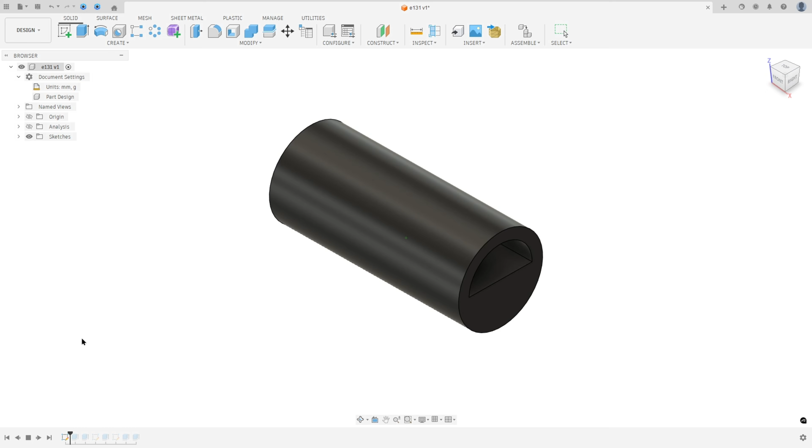Let's make one more tutorial in Autodesk Fusion. In this video, you'll learn to use the extrude and offset extrude. So open Fusion and let's go.

The first step to create this part, we will select the right plane and create this sketch. First we'll create this line here and these two lines. This line has 150 millimeters of length, and these two lines have 10 millimeters of length. The midpoint will be in the center of this line.

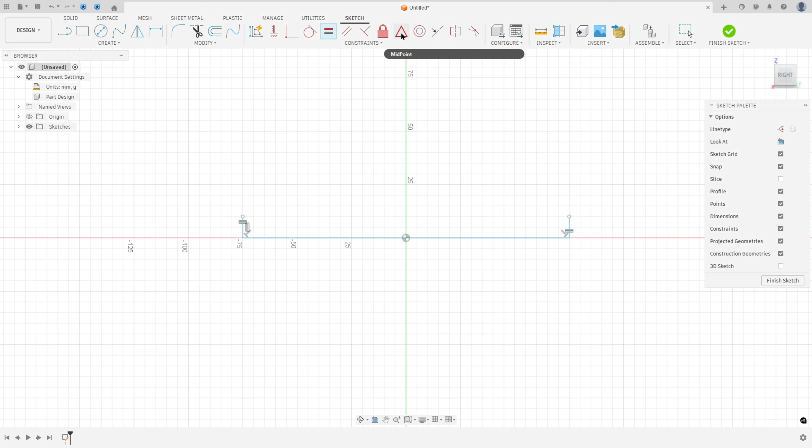Open Fusion, go to create a sketch, and select the right plane. Select line, make this sketch here, and go to constraint, select equal, select this line and this one. Go to constraint again and select midpoint, select this line here and the center point here.

Now go to sketch dimension. The length here is 150 millimeters. This line has 10 millimeters.

Now we will create this circle. This circle has 40 millimeters of radius, and the distance between this edge here and the midpoint is 20 millimeters.

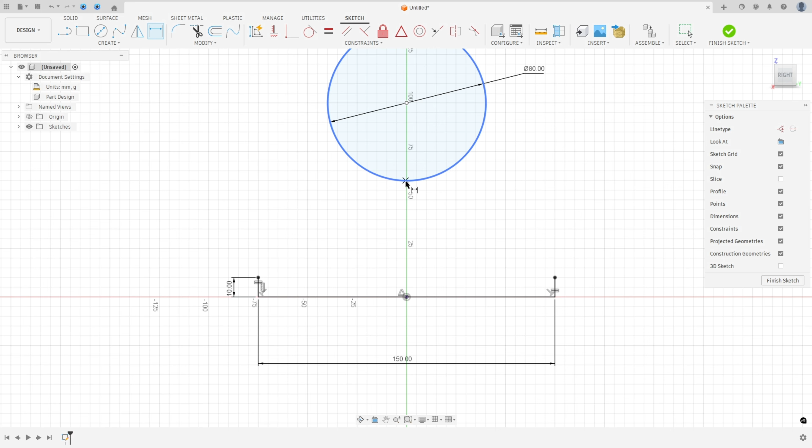Select this circle, make a circle here, 80 millimeters of diameter. Go to sketch dimension, click with the right button and select Pick Circle/Arc Tangent. Select this point here and this point here. The distance here is 20 millimeters. Go to constraint, select horizontal/vertical, select this point and the midpoint.

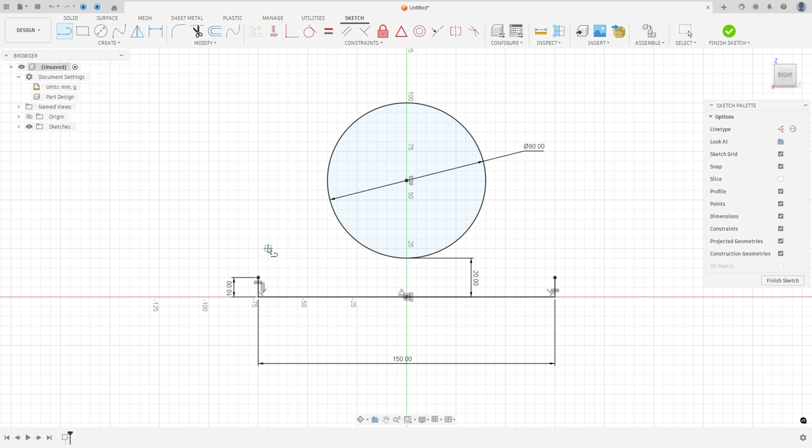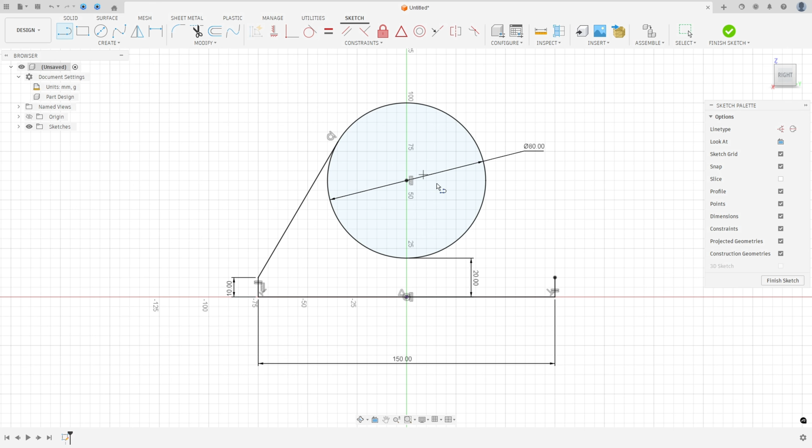Now we will make this line here and this one. This line is coincident with the point here and tangent with the circle. Select line, click on this, and click on the circle. When you see this symbol, it means the line is tangent with the circle. Or if you don't find this, just click in the circle and go to constraint, select tangent, select this line and this. Make the same on the other side. Sorry, I made two lines here.

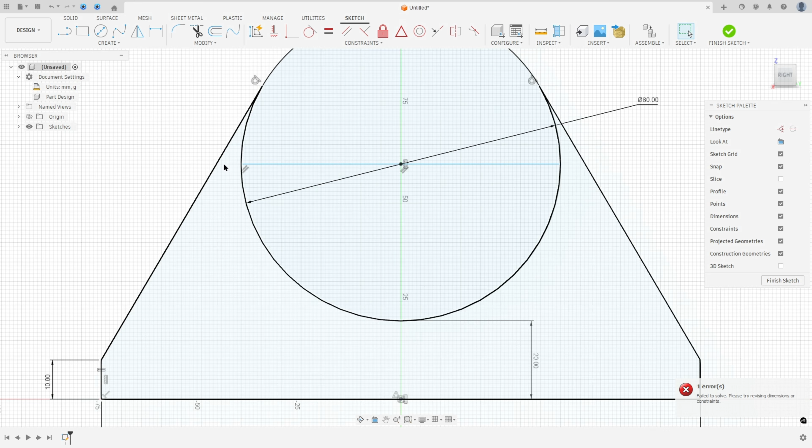Now we will create this arc here, and this line. This arc has 30 millimeters radius. First, select a line, make a line here between the sides of the circle. This line's midpoint must be this point here. Select the midpoint and select line, make sure this line is coincident with the circle, and it must be a horizontal line.

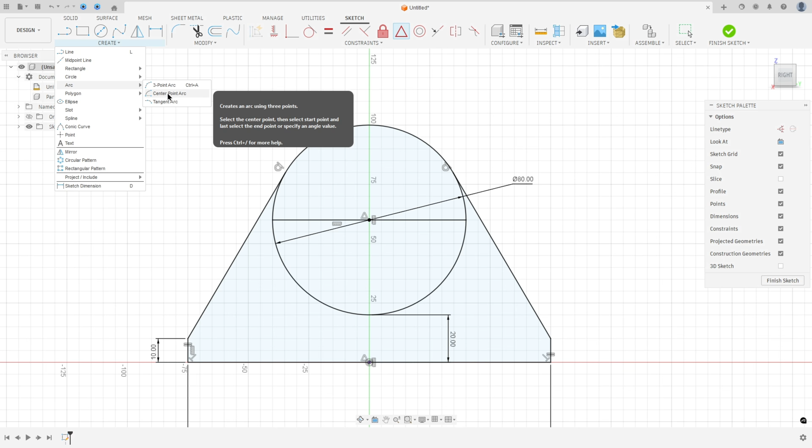Plus the reference here, sorry. Go to create, select the arc, center point arc, click in the midpoint. This arc has 30 millimeters of radius, so click in this line and click in the other. We made this sketch here.

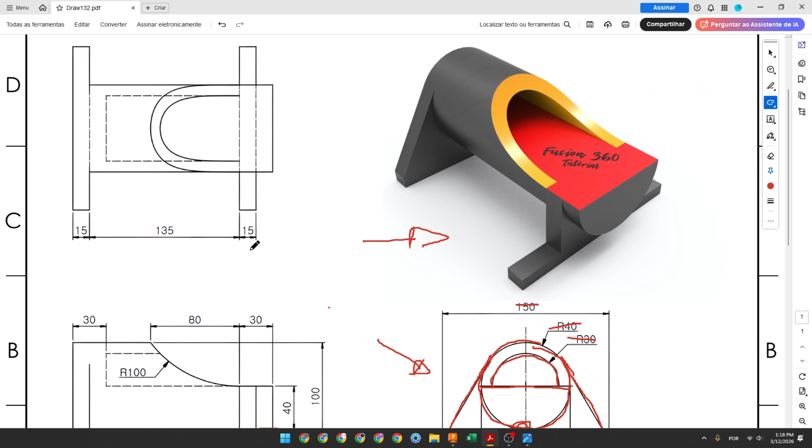Now finish the sketch, we will extrude this. First we will extrude this cylinder, the distance 180 millimeters. Go to extrude, select this profile here and select this arc here, 180 millimeters, operation new body, press OK.

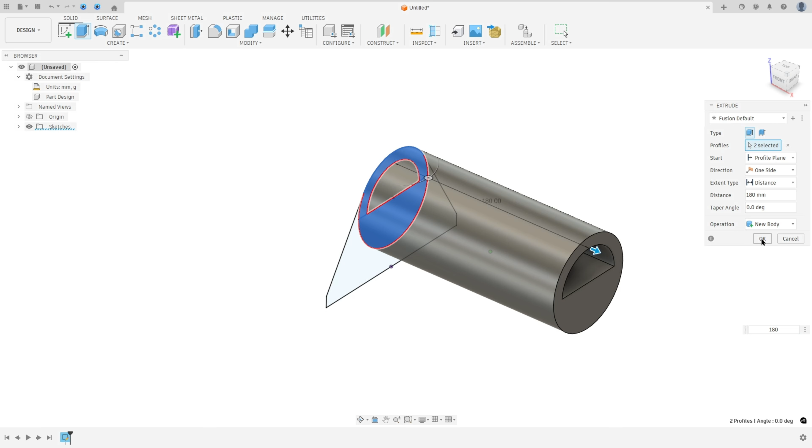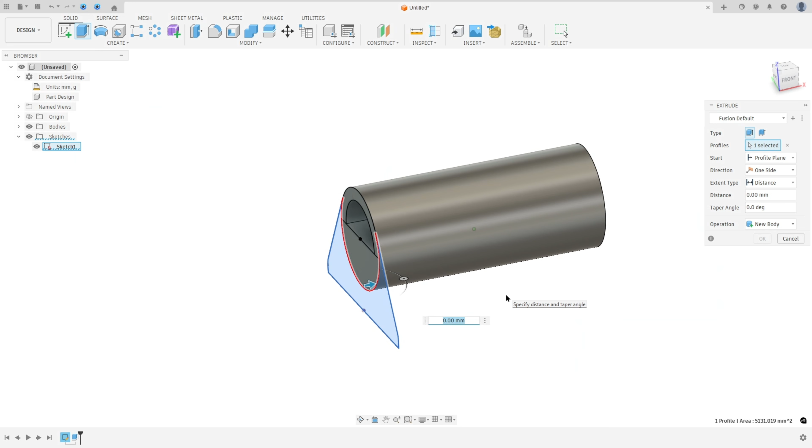Show sketch one and go to extrude. Here we will extrude this area, so we need to extrude this 15 millimeters, the base. Select the base here, 15 millimeters, operation join, press OK.

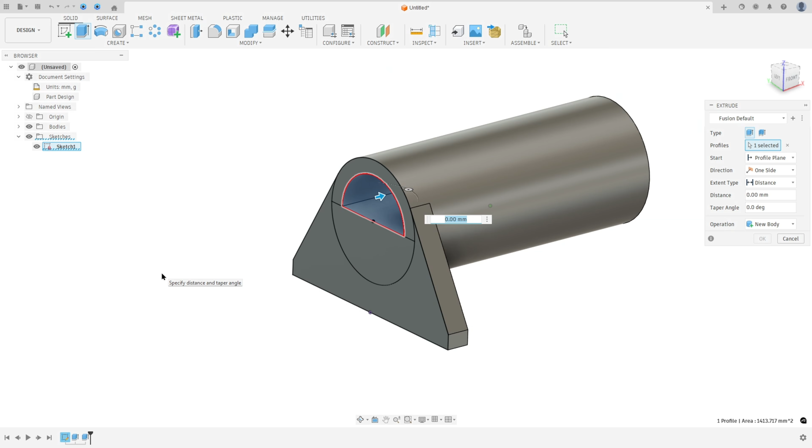Now go to extrude again, we will extrude this profile here. Distance here is 30 millimeters, to face. Operation join, press OK. Let me show the extrude here.

Okay, we made these 3 extrusions. The distance here is 30 millimeters, 15 millimeters here.

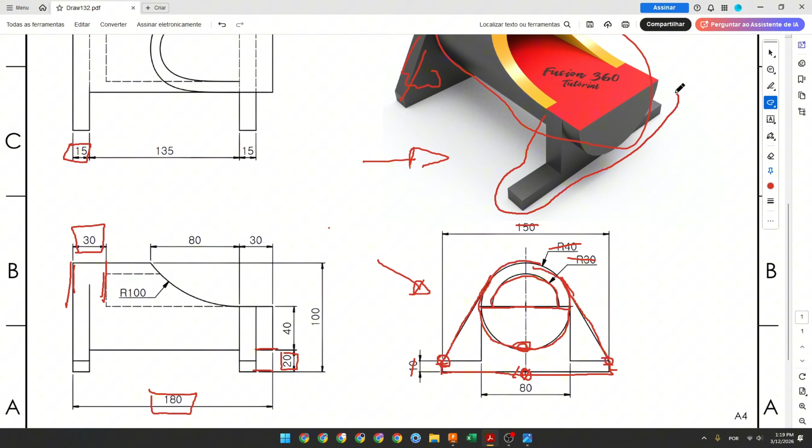Now, while we made this base here, created this base, we have the sketch here. Let me remove the red lines. Here, the sketch that we make will be this one.

The same dimensions here. The only thing we'll make is this line and this one. The distance between these 2 points is 80 millimeters, and these two lines must be equal. We'll make a line here, tangent with this.

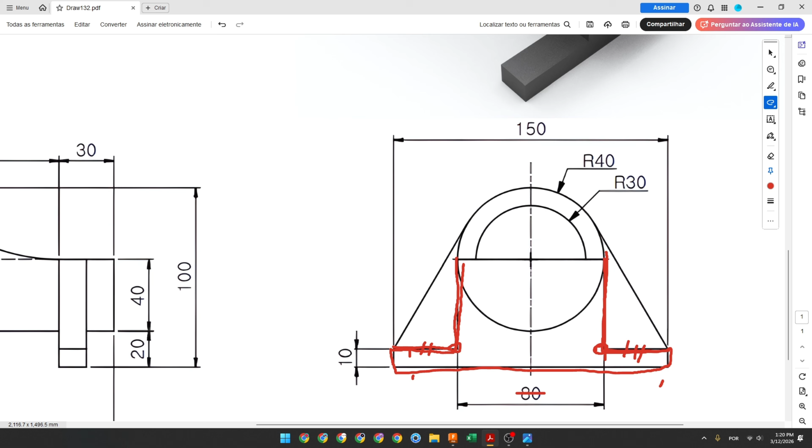So go to create a sketch, select this face. Create, select project, select this face and this one. Now select the line and make a line here. Create another line here. Go to constraint, select equal, make these two lines equal. Go to dimension, the distance between these 2 points is 80 millimeters.

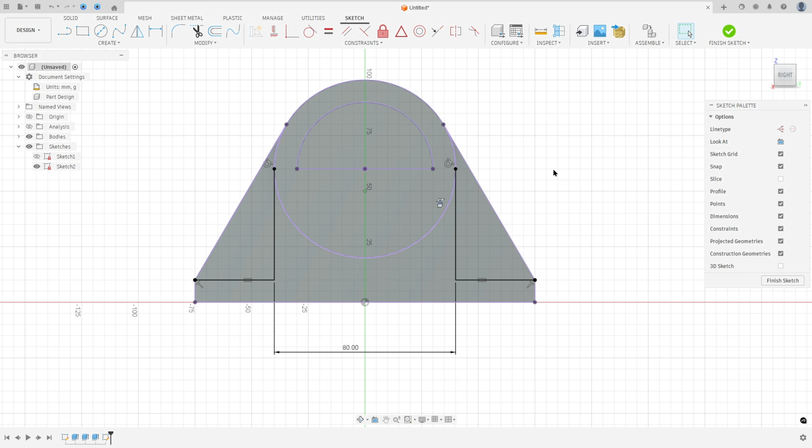Now select the line, click on this point, make a line here, and make a line here. This line must be a vertical line and coincident with this circle. Finish the sketch, go to extrude.

We need to extrude this area. The thickness here is 15 millimeters, and the distance between this face here and this face is 30 millimeters. There are a lot of ways to make this.

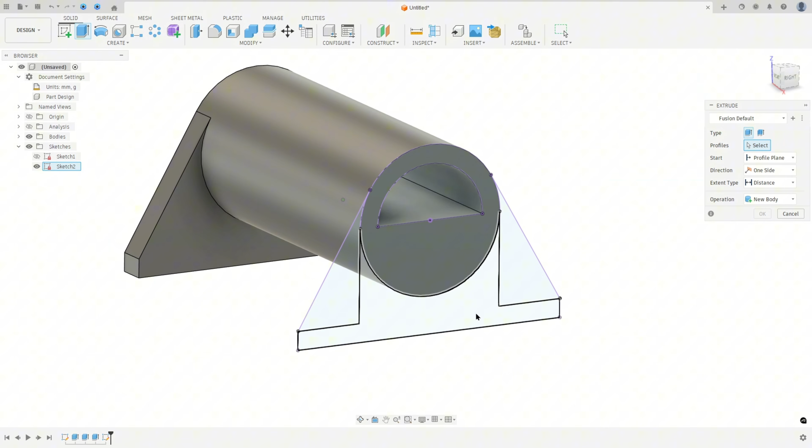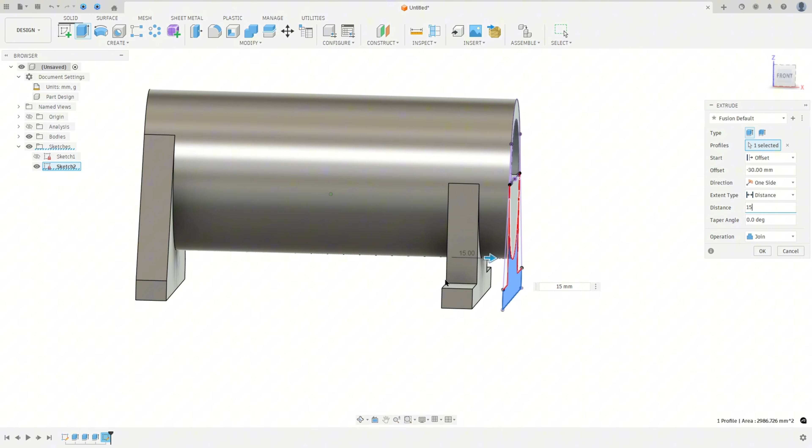Here, we will select this profile, and in the start, select the offset plane. The offset here can use minus 30 millimeters, and the distance 15 millimeters. Okay, you can make it this way, or you can use minus 15 millimeters, the distance here minus 15.

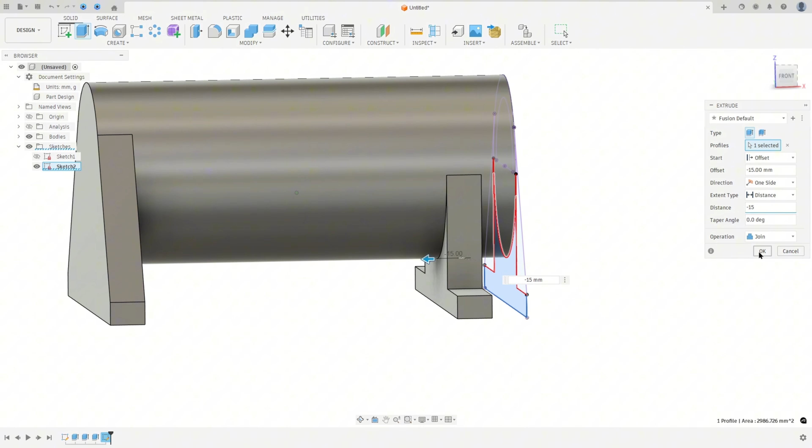So it will extrude to the left side here, and the distance between offset this face here and this face is 15 millimeters. The operation here is join, press OK. Measure this, select this face and this face here, 135. The distance here, and the distance here is 30 millimeters.

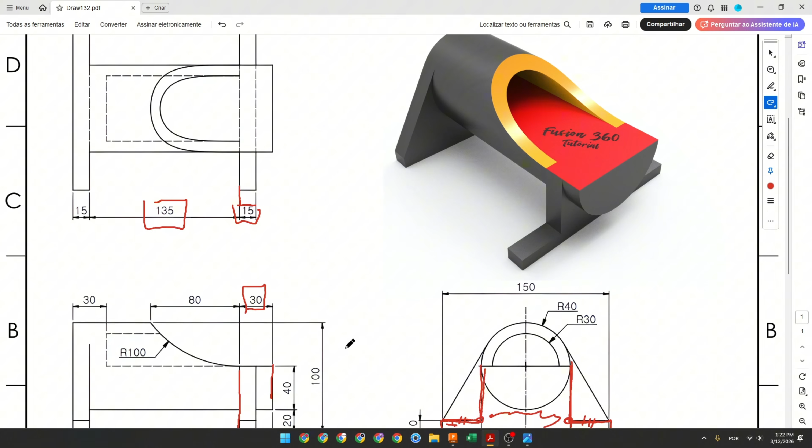Now we will create this cut. To create this cut, we will select the front plane and make this sketch here. And here we will create this arc. This arc has 100 millimeters. The distance between this point here and this point is 30 millimeters.

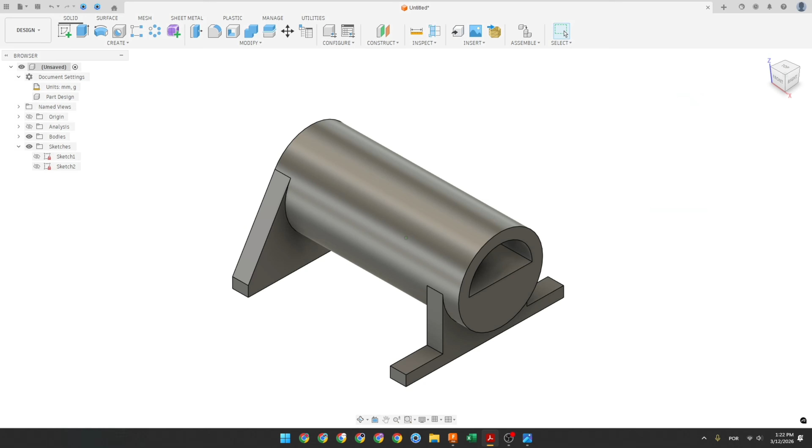This arc is coincident with this face, tangent with it. Go to create a sketch and select the front plane. And here, go to create, select the body. You can use intersect, this body here, and select this face here. Press OK.

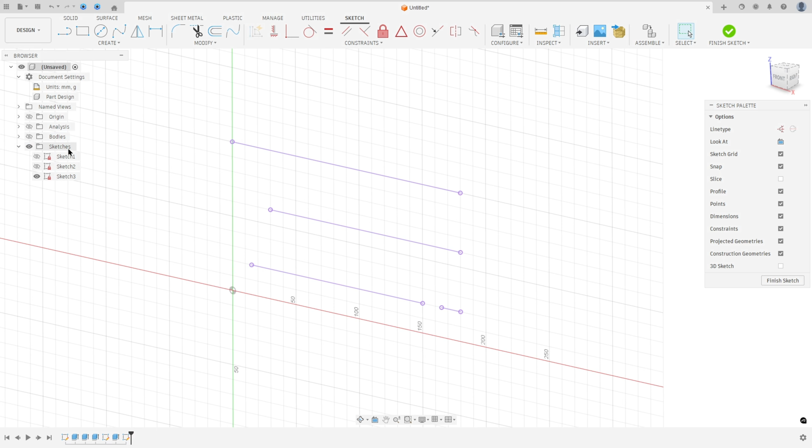And here, let me hide this body, this one. Go to create, select the arc, 3-point arc. Click on this line and this here, make an arc here. Make sure this arc is tangent with this.

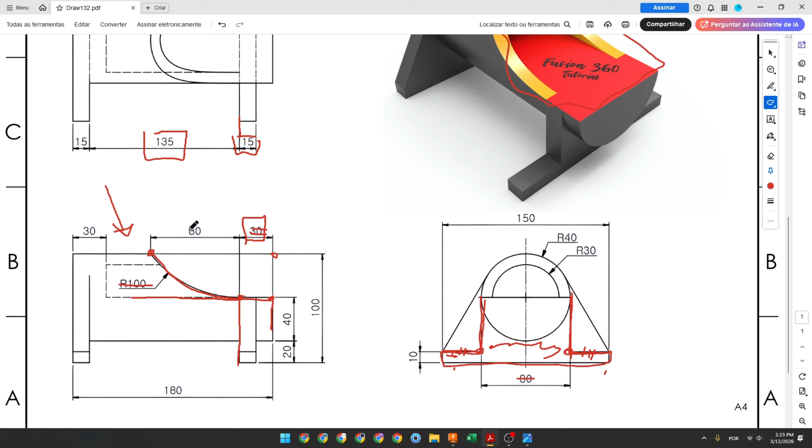Go to sketch dimension. The distance between this point and this point here, 30 plus 80, the radius 100 millimeters. The distance here, 30 plus 80 millimeters. And here the distance between this point and this point must be 30 millimeters.

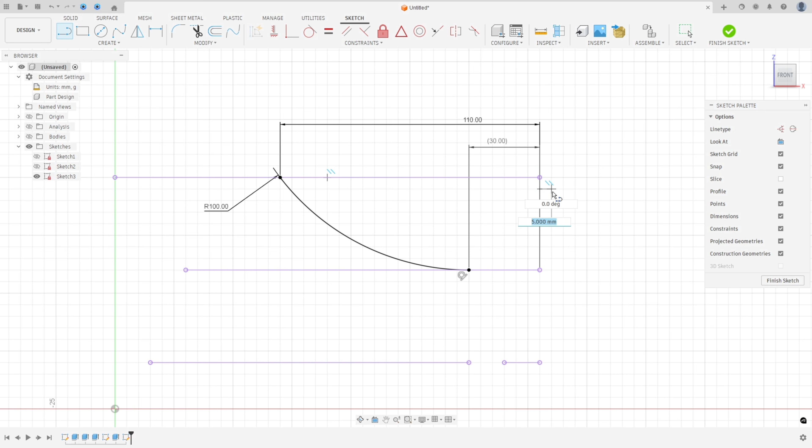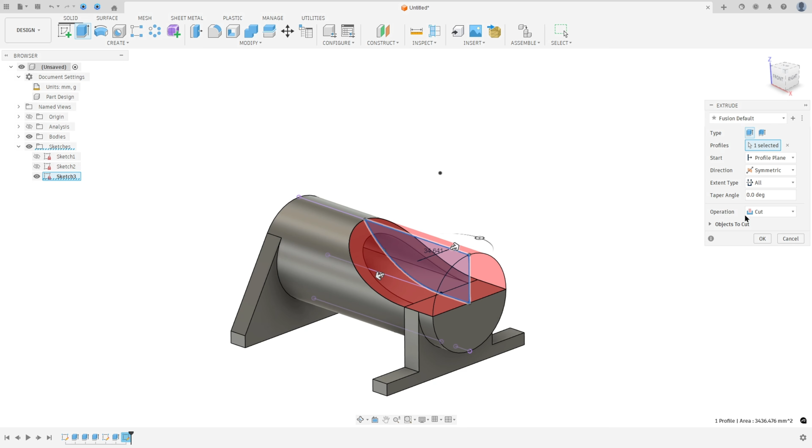Now we will create a line here just to close the area, and we'll make this area. So finish the sketch, show this body here. Go to extrude, we need to remove this area. So the direction, select symmetric, and the extent type, select all. Operation cut, press OK. We made this.

So here we finish our exercise.